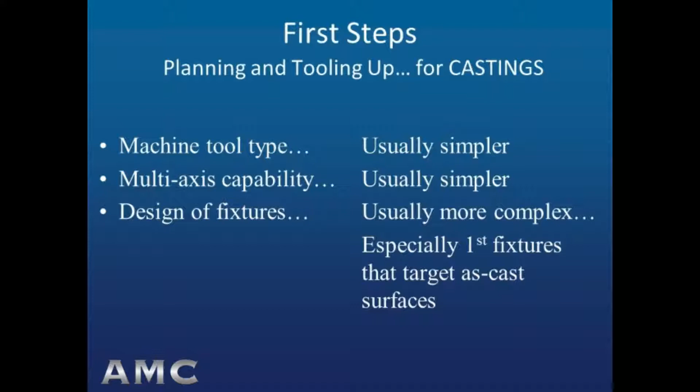Instead of fixturing against the consistent surfaces of wrought metal blocks and bars, and forming complex geometry with simultaneous multi-axis pallet and tool movements, castings already have almost all of their final complex net shape. Initial fixturing is against those as-cast surfaces.

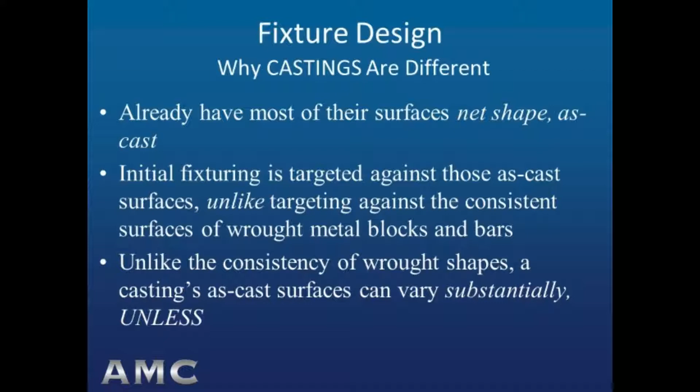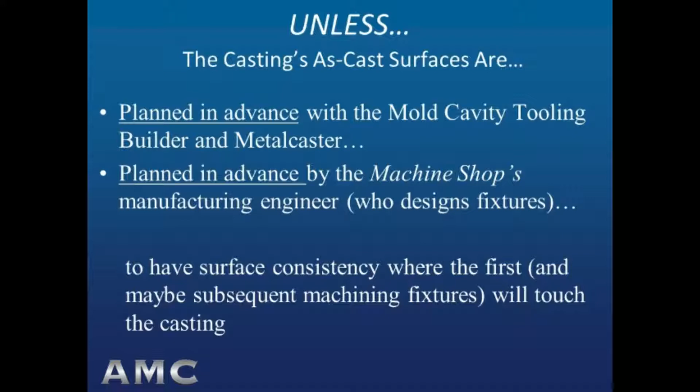Compared to wrought metal surfaces, as-cast surfaces can vary substantially, unless they are planned in advance with the mold cavity tooling builder and the metal caster, and planned in advance with the machine shop's manufacturing engineer, to have surface consistency where the first and maybe subsequent machining fixtures will touch the casting.

The most concise way to convey the uniqueness of machining castings in these first steps is through pictures. I have organized the sequence of pictures on the basis of machine tool type, multi-axis pallet type, and finally fixture design: first, old school non-CNC machining; second, CNC machining with one axis; and finally, CNC machining with a multi-axis rotating pallet. Now, let's take a look.

Our first example is an old school non-CNC drilling of a shoulder bolt clearance hole by means of a heavy-duty drill press. The casting is net shape, 98% as-cast.

The fixture design is very clever, and it is based on principles of geometric dimensioning and tolerancing. The fixture holds the casting the same way it assembles on the 18-wheeler truck, controlling the pivoting of its hood opening and closing. Cosmetically, a right and left-hand casting controls the gap between the truck's hood and cowling, so dimensional control for alignment is important. The casting is made in the resin shell process, which is the most accurate of sand mold processes.

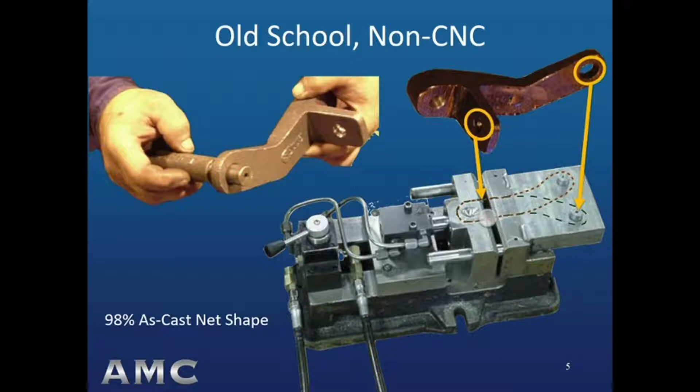6,000 pairs of these castings were shipped annually with no returns or no complaints from the truck manufacturer.

Here is a single-axis horizontal CNC setup for machining a ductile iron sand casting that functions as a cover. The horizontal CNC machine tool has two general-purpose tombstone fixtures, clamping the casting on drafted surfaces, which we will talk about in the next slide.

The two similar fixtures are required to access each side of the cover. This casting is about 65% as-cast net shape, which is on the low end of as-cast versus machined features. The inset below shows each side of the casting prior to and after machining.

Although it's a simple casting, there is an important fixture design consideration to be illustrated here. The casting has a drafted surface around the entire perimeter of its rectangular shape. Normally, it's good practice not to fixture on drafted surfaces.

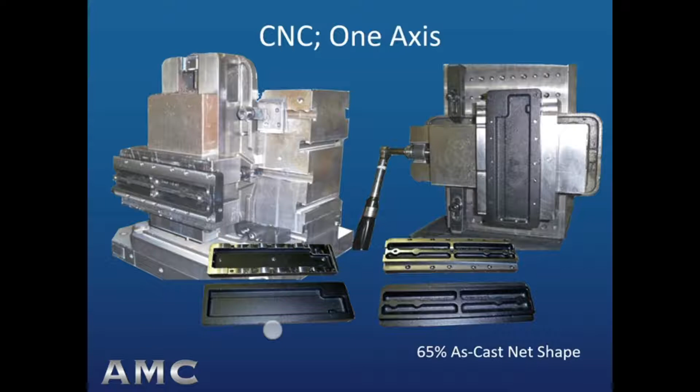However, if it is done carefully with an understanding of how draft works, setting up on draft can be successful, realizing that the draft is really a combination of an offset and a draw length, like the offset and depth of a cupcake pan. In this case, the draft offset is the same all the way around the casting, so a 3 degree dovetail on the fixture's clamp surface can readily match the draft.

The important part of fixture design against a draft surface is to clamp the casting at the same offset level wherever the casting's draft is touched. To accomplish that, a go-no-go gauge is used by the machine operator to make sure that the casting's front surface is at the same elevation across both dovetails. The idea is expressed by the green lines along the fixture's dovetail clamping surfaces.

Once that no-go gauge is satisfied, the casting can be fully clamped and the holes and the mill surfaces will be oriented correctly to the casting's as-cast datums.

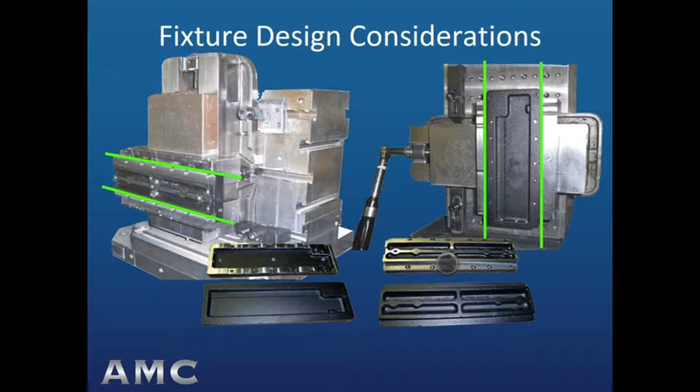This one is an actual DLA legacy casting with its 1977 2D drawing in the background. It is a one setup, one axis, vertical or horizontal CNC machining example.

Shown in the foreground is the first solid model built by the mold cavity tooling builder, which replicates what the drawing calls for exactly. It does not have draft or parting lines or other features of its air-set sand casting process. This first solid model just replicates what's required on the 2D drawing.

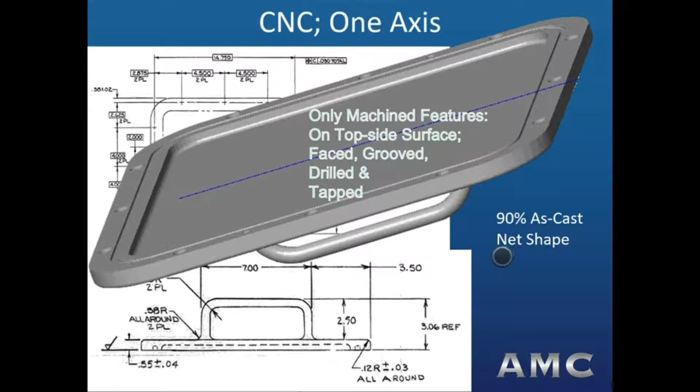The casting is 90% as-cast in its net shape, and the only machined features are on the top side surface, faced, grooved, drilled, and tapped.

The 2D drawing does a decent job of defining and implying the as-cast features, which become the datums for the machining setup.

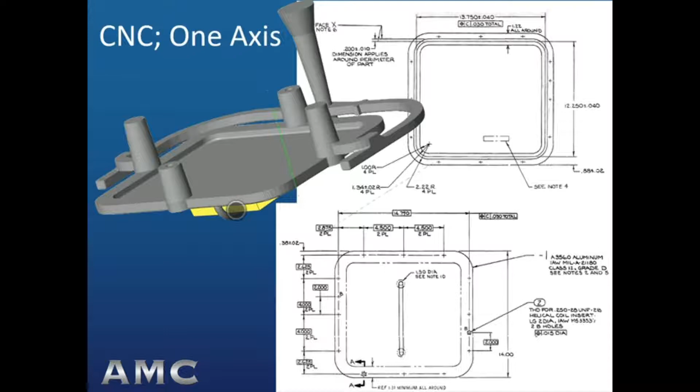Shown at the lower left are the primary, secondary, and tertiary datum targets to assure that the machined features on the top surface are located correctly. The view at the upper right shows how the casting would be clamped in the fixture.

The green surfaces are where risers were attached. It is okay to push against those for clamping, but they should never be used for datum targeting because they are hand cut and hand ground to match the casting's molded profile. Too uneven to be used for targeting.

The handle feature is used to pull the casting down in the fixture against the three datum A targets. As we saw in the prior ductile iron casting example, the two datum B targets and single datum C target touch the drafted perimeter of the casting's rectangular profile.

Once again, it's okay to target on a drafted surface so long as the draft angle remains the same where targeted and draft offset is touched at the same elevation. Note that B and C datum targets are smaller in diameter to assist in touching the draft surface at the same offset elevation.

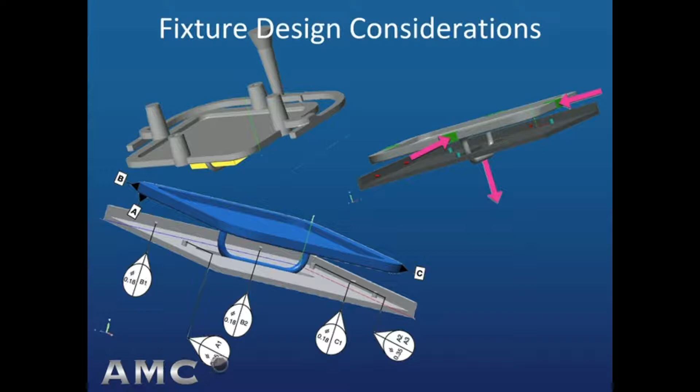Here is our first more complex casting geometry. It is a high alloy steel casting made in the ceramic shell investment process. It is machined in two single axis setups, one for a horizontal CNC and the other for a vertical CNC machining center. Like so many other investment castings, it is 97% as-cast in final net shape.

The accuracy and surface finish of the investment process enables the faces of the drilled and tapped surfaces to remain as cast. Those are shown in pink.

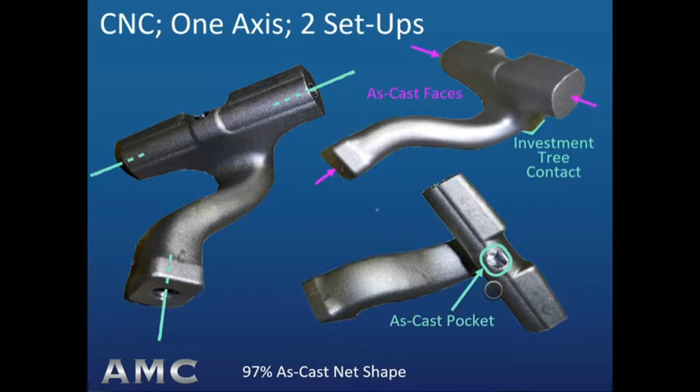At the lower right is an as-cast pocket whose size and position tolerances are met by the capability of the investment process. The design of the fixture for the horizontal CNC machining center is shown here.

Holes are drilled and tapped on each side of the casting's T-bar in a rotating fixture. Note that contact with the investment casting's liquid metal delivery tree is avoided in the fixture design.

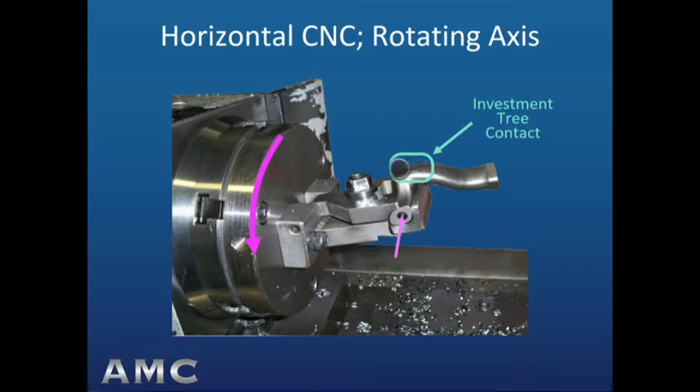The surface is hand cut and hand ground, therefore too wavy and inconsistent in surface profile to be set up against. Here is the remaining setup on a single axis vertical CNC for drilling and tapping of the remaining hole in the vertical leg of the casting's T-bar feature.

The hole is located against two adjoining faces at the end of the vertical leg and clamped with screws on the two opposite faces. Self-locking clamps hold the T-fixture in place against the drilling forces. Note, once again, the investment mold tree connection shown in the blue-green oval is avoided in the fixture design.

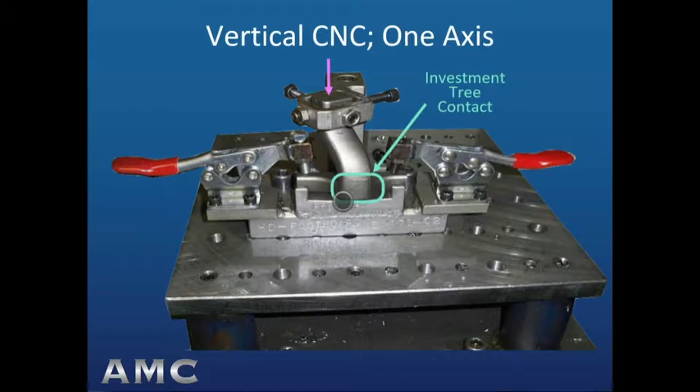This is an interesting example of more complex machining in 3 planes, but accomplished with a simple single-axis CNC setup, followed by an innovative multi-axis pallet setup on a horizontal CNC. The images at the upper left are the as-cast surfaces, and those at the lower right are the finished machined part. Despite being machined in 3 planes, the casting's final net shape is still about 80% as cast.

The casting is very simple. It is an air-set aluminum casting formed vertically in the mold with no cores. The as-cast geometry at the upper left shows how the mold is parted, with the gusset features formed in the lower half, or drag half, of the mold. The casting is gated and risered at the parting line of the mold, on what becomes the dovetail machined feature.

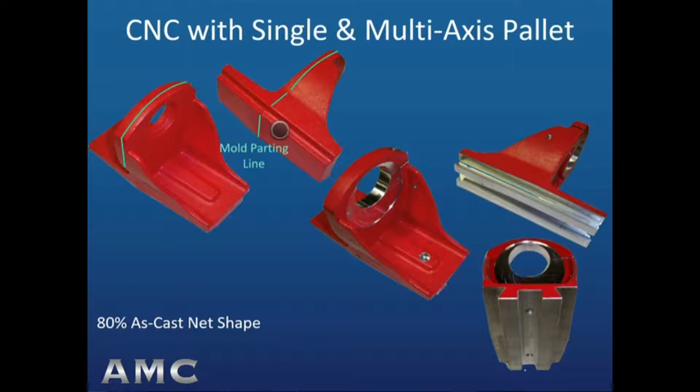The first setup is a single axis vertical milling of the dovetails on the bottom of the casting. The image at the upper left is marked up with one concern for this casting mold design. If the mold were to shift in the direction of the green arrows, then the machined dovetails would be skewed with respect to the casting's proper centerline.

To mitigate that possibility, the casting is clamped primarily against the vertical face between the side gussets. Then adjustable targets with limiting stops are tightened against the fixed targets on the back side of the casting in the same relative positions. If the adjustable targets with their stops cannot tightly clamp the casting side to side, then the mold is shifted beyond the tolerance limit. In that case, the casting is set aside, not machined, and returned to the foundry.

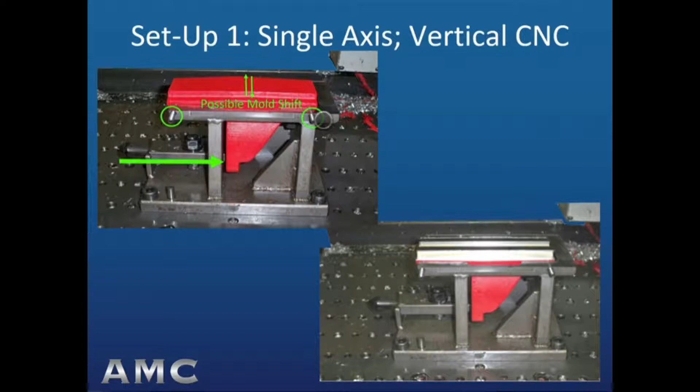Otherwise, as we will see in the horizontal CNC setups, the casting is set up on its machined dovetails, no longer using as-cast surfaces to control the machined features in the other 2 planes. Now, we can see how the machining of the casting in the other 2 planes is accomplished.

Here we have a setup for the horizontal CNC with a 2-axis pallet with 2 fixtures mounted on it. The fixture at the left rotates the casting to access the face of the vertical feature and the sides of the gusset features. As machining begins, the casting on the rotating fixture has just come off the prior vertical CNC single axis setup that machined the dovetails.

As you can see, the machined dovetails are now the setup feature for the completed machining in both fixtures. The casting on the right-hand fixture has come from the drilling and boring accomplished in the rotating fixture. The insets at the lower left show the finished machined casting in its 3 planes of machining.

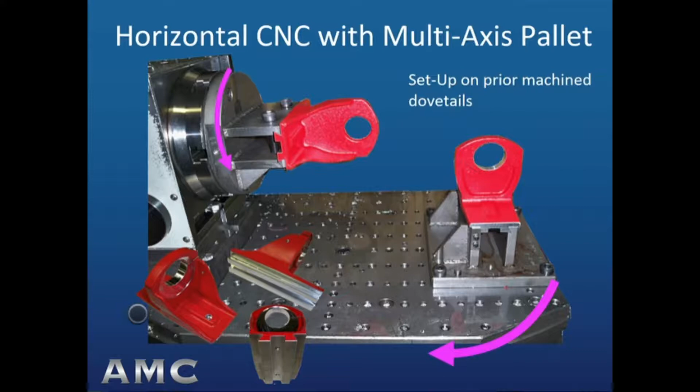The takeaway from this example is the clever use of relatively unsophisticated vertical and horizontal CNC machining centers, making a fairly complex finished machine net shape from a simple air-set sand casting with no cores. The casting's net shape remains relatively high at 80% as cast, and the overall cost effectiveness of the manufacturing engineering of this finished casting is excellent.

Our next example is a casting made for the same customer as the prior example. This one also has a machined dovetail on the bottom side. However, it is an entirely different casting and is molded completely differently. Like the prior example, this casting is machined in 3 planes, but only uses 2 fixtures instead of 3. This is done by applying all the axes of the horizontal CNC's multi-axis pallet.

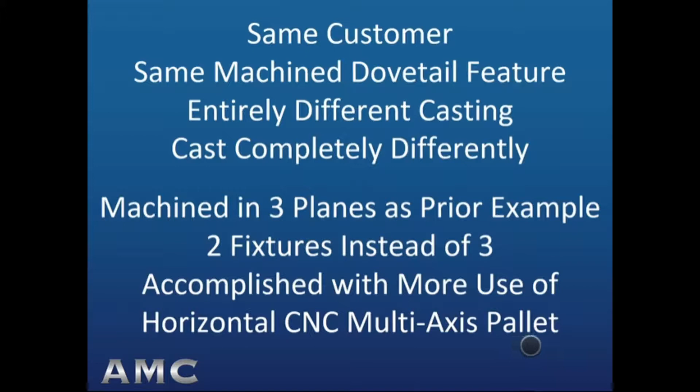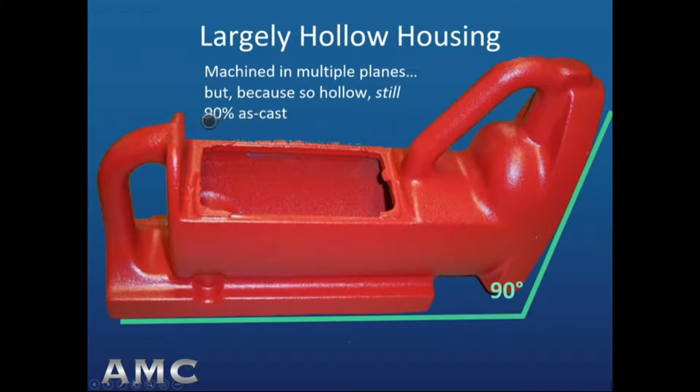Here's an overview of what the casting looks like. The photograph was taken with a wide-angle lens, and the vertical surface at the right-hand side really is at 90 degrees with respect to the bottom. The main point is the casting is hollow all through its center, and the hollow section extends into and through that 90-degree feature at the right. Even though the casting is machined in 3 planes, because it is so hollow, it is still 90% as cast in its finished net shape.

Here are some as-cast features that are important to the machining of this casting. First, the mold parting line is along the major axis of the casting along its length. Second, you can see riser contacts on the bottom of the features that will become the dovetails. It is important for the foundry to grind those riser contacts down near the adjacent mold surface, but not below it.

If a riser contact is underground, the grinding may cause the machine surface to not clean up. On the other hand, if the contact is left too high, especially in alloys that are more difficult to machine, such as steel, a sudden heavy cut may damage the tooling.

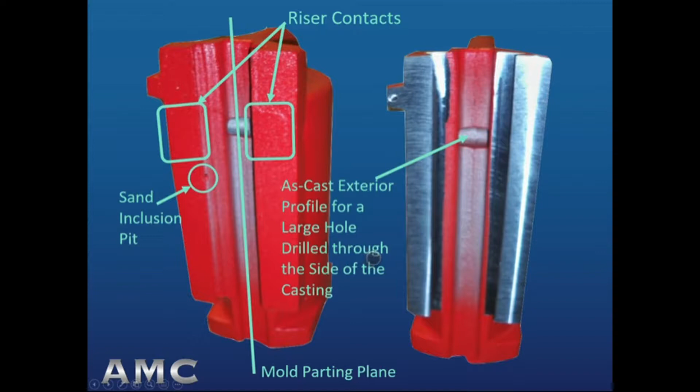Finally, there's an interesting little cylindrical feature in the right-hand view that provides extra material to form the as-cast exterior profile of a large diameter drilled hole through the side of the casting.

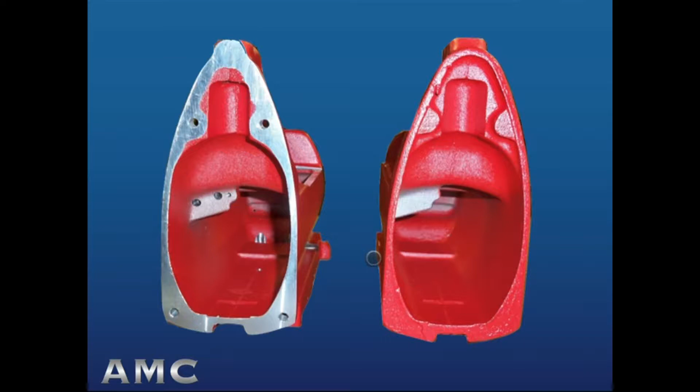Here is a view of the machining of the casting's top features and a view of the right-hand vertical face. Finally, the side with multiple small drilled holes and the large hole that require as-cast cylindrical stock between the dovetail rails. And now, the manufacturing engineering for the machining.

This is the first machining setup for a vertical CNC with only one machining axis. This is similar to the first setup on the prior red casting, but this setup has less risk of machining misalignment. The prior red casting was targeted and clamped on molded draft at each end.

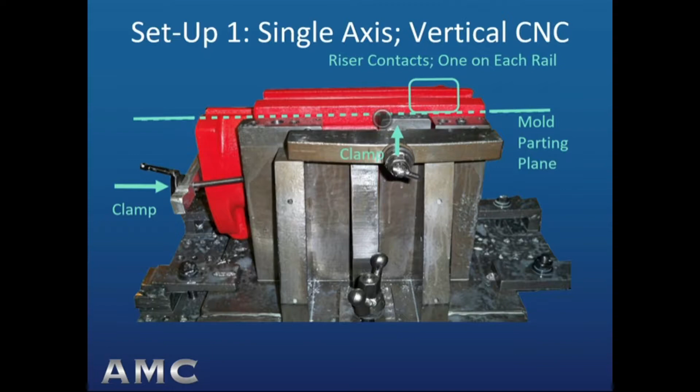The required clamping screws had stops to prevent mold shift that could cause misaligned machining. If the stops prevented a tight clamp, the casting was set aside and not machined. Here, there is no draft issue, and the clamping and targeting is a simple across the width of the casting and along its length. As noted previously, the riser contacts are machined away in the face milling of the dovetail features.

Here is the pallet for a horizontal machine tool that rotates in two planes. Mounted on the pallet is the fixture that will clamp onto the dovetails machined in the first fixture.

In the next slide, we will see how the casting is set up on this fixture and how the pallet rotates to enable the machining of all the features in two additional planes with this single setup.

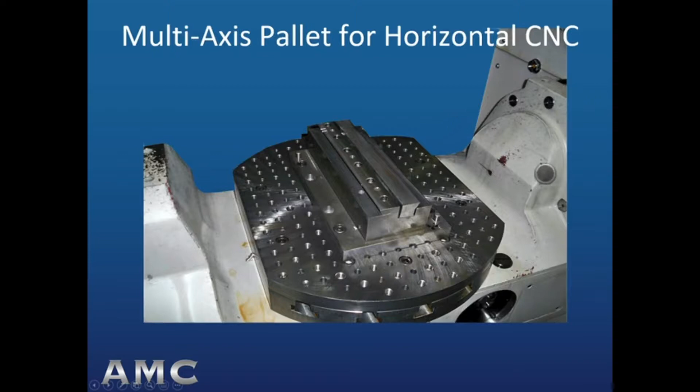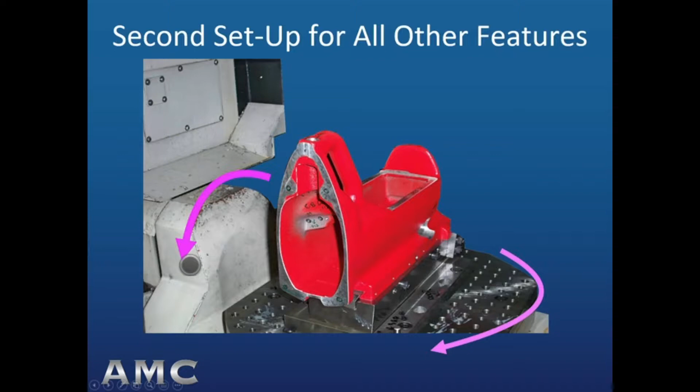Now we can see how a single setup on the machine dovetails enables all other drilled, tapped, bored, and milled features to be performed through the rotation of the horizontal CNC pallet. In summary,

Machining of castings is a market niche significantly different from the extensive multi-axis machine geometry formed from simple wrought shapes. The distinguishing niche characteristics of machining castings are: a very high percentage of the features are net shape in their as-cast form. Castings have anomalies on their surface features that must be avoided in fixture design.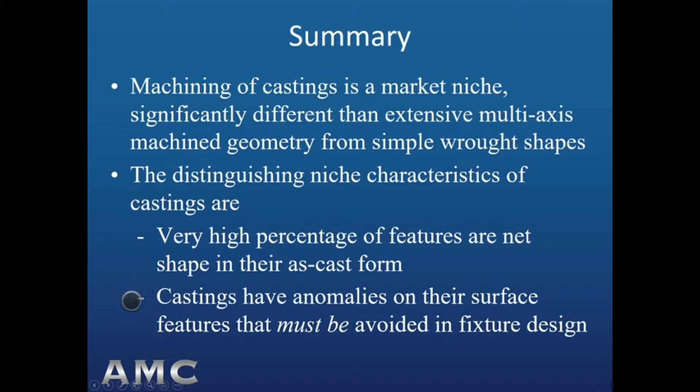Although draft is an anomaly with respect to the 2D drawing, which typically allows draft but doesn't specify where it shall be, draft can be accommodated in the machining fixture design with careful manufacturing engineering between the mold cavity design and the machining fixture design.

Machine tools have many types, may be applicable for the machining of castings, even the old school non-CNC tools. Multi-axis CNC machine tools are important in casting machining for access to machining planes for relatively simple cuts.

Collaborative manufacturing engineering of machining fixtures with the mold cavity tooling builder and the metal caster is critical to cost-effective machining success.